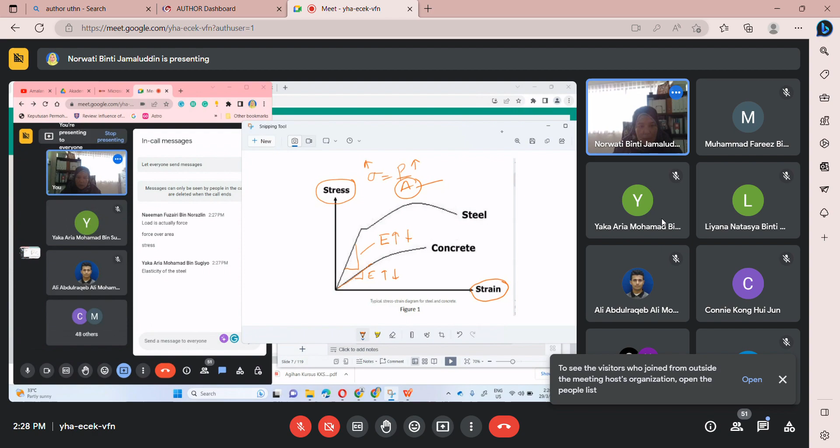So what can you say? Is this one higher or lower compared to concrete? Other than Yaka, I want other people too. Muhammad Aqil Faeq, yes. Is it high or low, still compared to concrete from this diagram?

We do not talk about higher concrete strength. We concentrate specifically on this figure, referring to the response from the stress-strain diagram.

your desired size - sorry, I'm not feeling well. Okay, based on your desired size, sometimes you need to build up the section because of the standard size. For this class, we will refer to standard sizes based on the Blue Book. So in the Blue Book, you can see a lot of sizes.

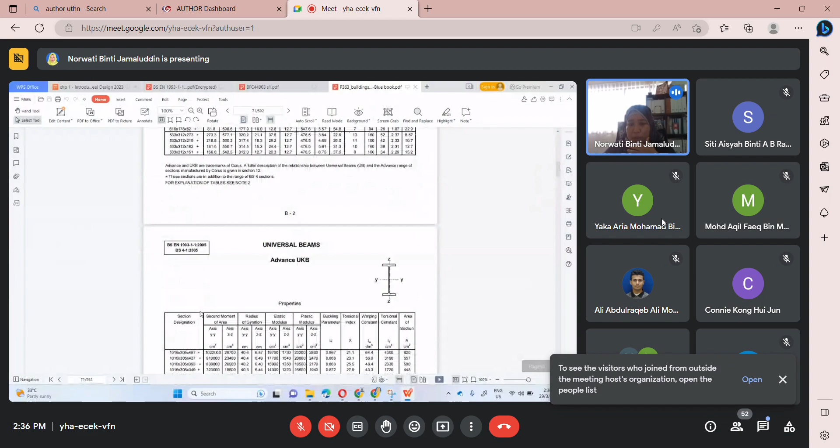I'll just take one cross section, we call it universal beam. See how many sections we have? A lot, right? See, okay, the largest is 1 meter, 1 meter. And then the smallest is 300, no wait, 127 millimeters in terms of its depth, in terms of the depth, the height. Sorry, not depth, height here.

127, okay, this is the design method section. The actual height is also 127, though sometimes it will not be the same for all cases. Okay, you can see from here, this is the section designation, this will represent it a bit.

Okay, I'll take the section on the top. This one, 305, means that this is the height, roughly 305 millimeter. But if you look at the actual height, it's only 311.

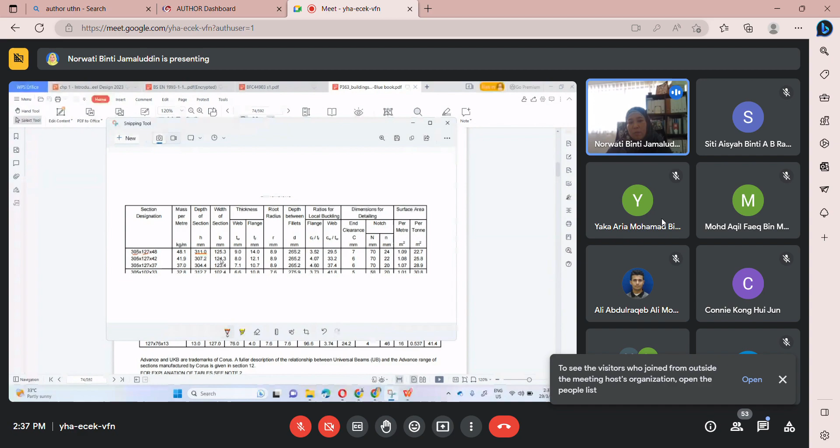This one represents B127, actual 125.3. You can refer to this diagram. This is H1, this is the B, the breadth. TW is the thickness of the web.

This is what we call the web. This one we call the flange. This is the thickness of the flange. Boleh faham? That is how you use the standard table.

That is about the term: hot roll, cold form, build up, fabricate - build up is the same. Normal structure steel has tensile and compressive yield strength in the range of 250 to 400 MPa, which is 8 times more than the compressive strength of normal concrete, and over 100 times more in terms of tensile strength compared to normal concrete.

Yield strength is an important characteristic in determining load carrying capacity of a structural element. That's why when we calculate, when we want to determine the capacity of the structure, the term we use is resistance. The formulation will be moment capacity resistance, MCRD - M stands for moment.

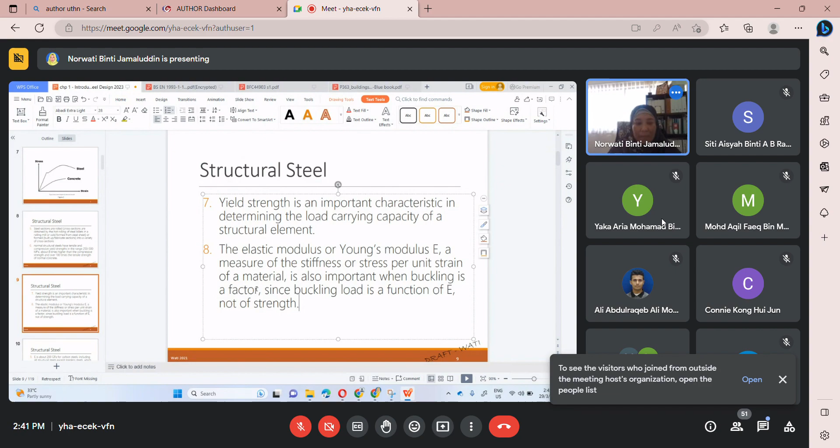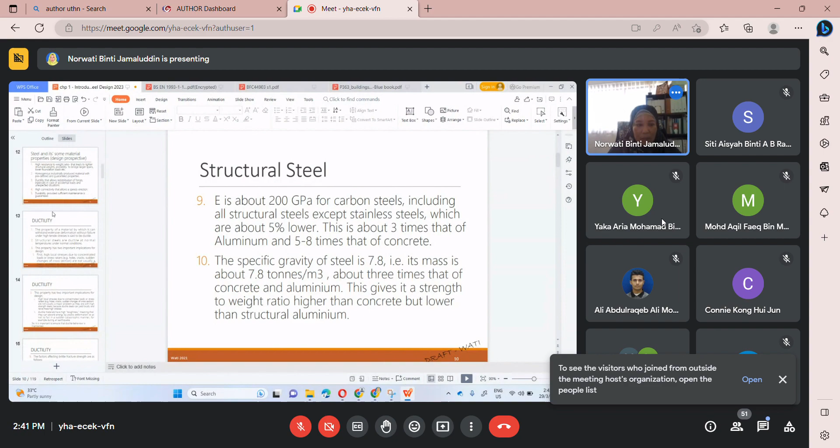We'll not go into detail for this slide, you can have my slide and read on your own. Now it's about steel properties. To design effectively, you need to know about properties of material. Steel is the strongest, stiffest and densest of the common building materials.

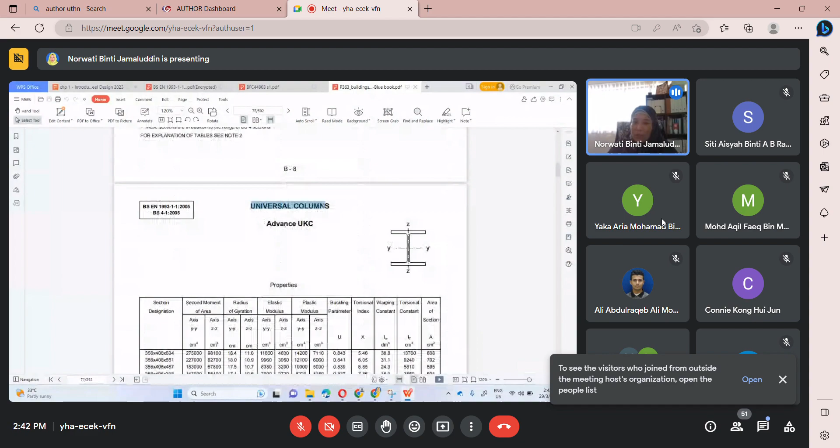Open section - what can you understand about open section? Let me just say it: open section, for example, this one - this is open section, this is universal beam. We also have another open section, UC or universal column. This is the shape, see, it is open, then we call it open section.

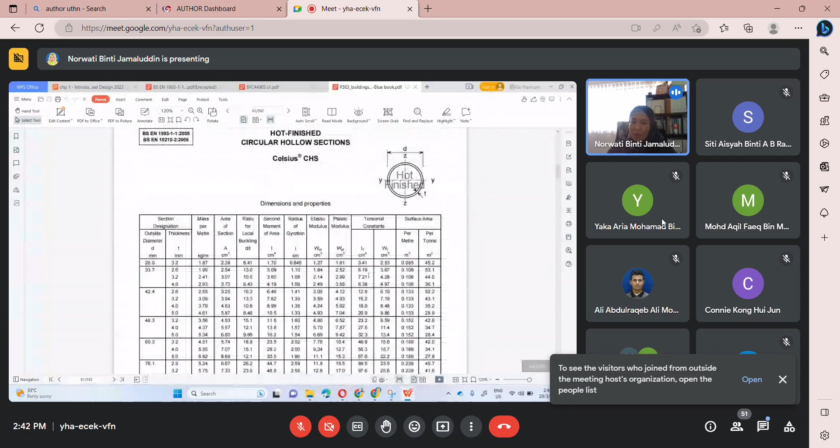We also have closed section, for example circular hollow section. This is closed section. So for open section...

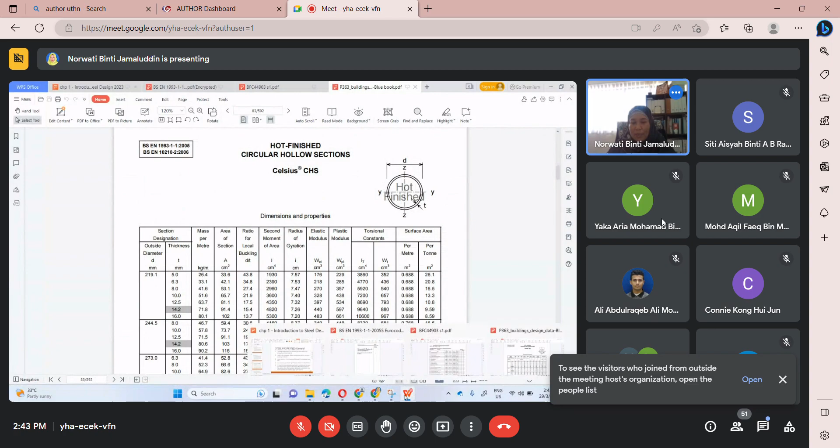It's prone to torsion force. Then when you want to evaluate the capacity, you need to consider torsion resistance because of the open section shape - from the testing, normally they will have much lower torsional stiffness compared to closed section. Box section, this closed section, will have higher flexural.

So what is good about higher flexural? High flexural, of course, is for elements you will use for flexural members like a beam. If a box section is good in flexural, let it be used for that example. Also, box section has higher torsional stiffness.

In case for a bracing system, particularly compression brace, a circular hollow section is most efficient structurally. This section also offers greater resistance to corrosion and is more aesthetically pleasing than open section. That's why if you look at a compression member, you will not find an angle section - normally we will use closed section.

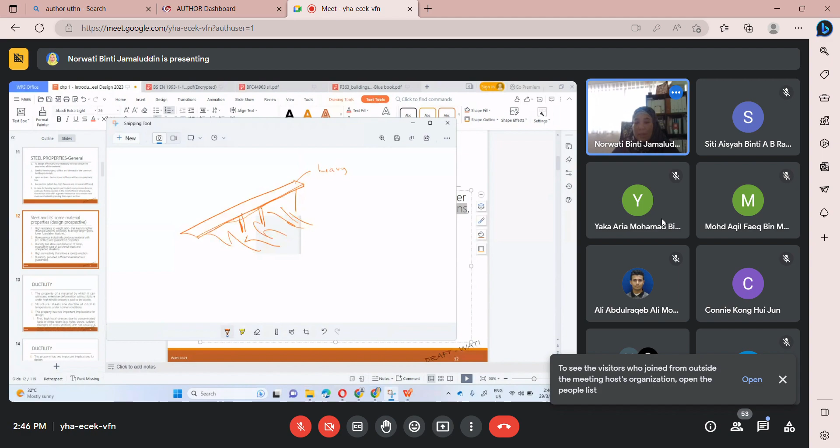Otherwise you need support - support we call a pier, pier here, pier here. That's just common sense, kan? If you can have a lighter weight, that means much lower load that will be supported by the foundation, so you do not need a larger foundation there.

And still it is a homogeneous material. Why is it homogeneous? Because it was manufactured in a controlled condition at the factory.

So it is a homogeneous, industrially produced material with predefined and guaranteed properties.

Okay, another property is ductility. What can ductility do? Ductile means it can stretch. Like when you hold plastic or a rubber band, you can stretch it far until it breaks. Okay, that is ductility. So steel is actually ductile.

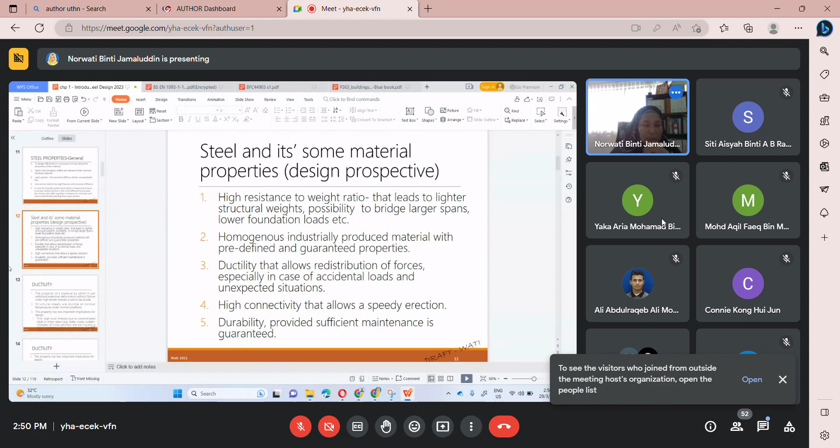Okay, durability - durable, tahan lasak (hard-wearing). Durability, provided sufficient maintenance is guaranteed. You want a durable car, right? Because we do not want to visit the workshop frequently. We want something durable.

So ductility and durability - these are the characteristics or properties of certain materials. Ductility is the property of a material which allows it to withstand extensive deformation, change shape extensively, without failure under high tensile stress. That's what's called ductile. Steel structures are ductile at normal temperature under normal conditions.

If you have an event of a very big fire, do not assume that the steel will sustain more loads. That's the weakness of steel material. But of course, when you choose to use steel material, you have to come up with fire protection.

This property has two important implications for design. First, for ductile material, it will have benefits especially when it comes to high local stresses. High local stresses will occur or be experienced by the structure when you have a concentrated load or stress raiser.

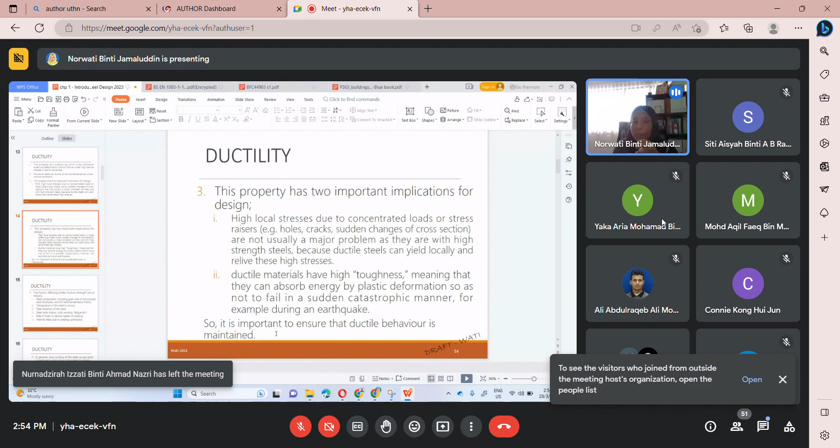There's a lot of other explanation regarding ductile material - I'll leave it to you. I do not want to go into detail down to the microscopic level, I'm not a metallurgy person. But of course you can read further for your own knowledge. This explains the arrangement of atoms in the steel structure at the microscopic level, because the manufacturing process actually affects this.

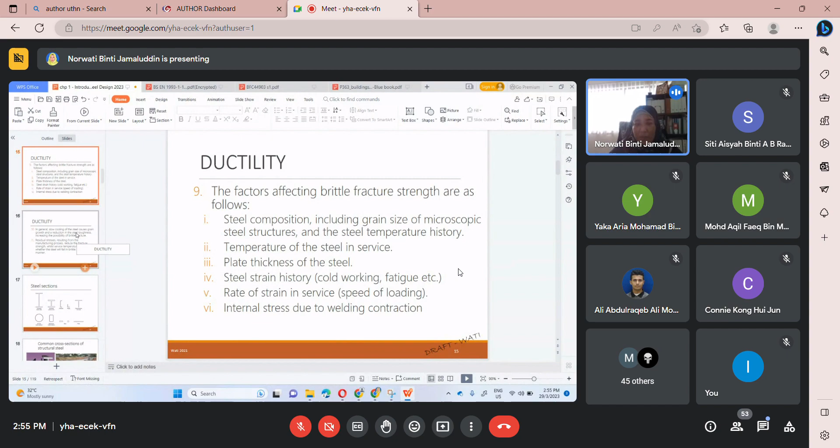That's why there's a different property between hot rolled and cold formed steel, because the grain size is also affected by the type of manufacturing. See, this is an example - slow cooling of steel causes grain growth and reduction in steel toughness, increasing the possibility of brittle fracture.

Residual stress means you put stresses into the structure. Apart from the manufacturing process, residual stresses can also come from welding - when you do welding, you actually introduce stresses. So residual stress reduces the fracture strength, while service temperature influences whether the steel will fail in a brittle or ductile manner.

Okay, so almost one hour. I need all of you to answer my one question.

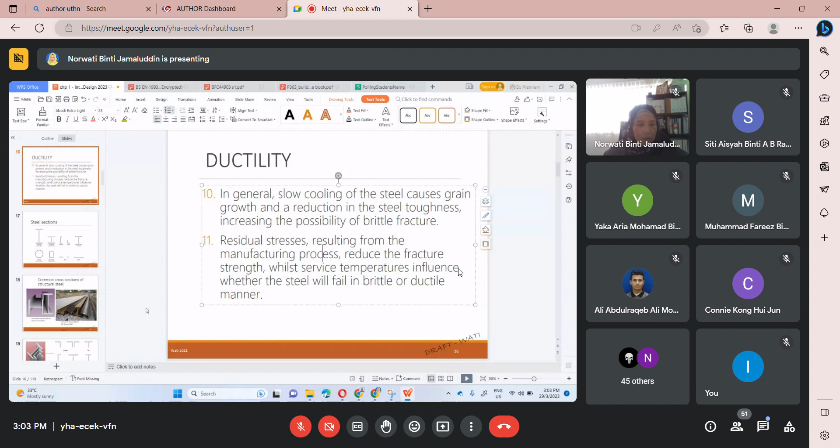Doctor hasn't turned on the mic. Sorry, okay, so I've ended the poll. Okay, we continue to our lecture.

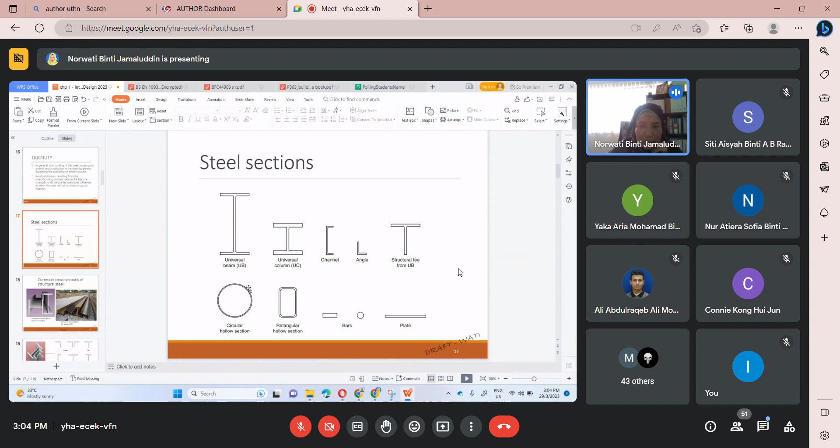So for steel section, actually we have various shapes and sizes of steel sections. Typically we will use UB, UC, channel, angle. That is the most common section shape used widely in the construction industry. Circular hollow section and rectangular hollow section, the other shapes are not so common. Structural tee not common, the common one is just this one.

Okay, here you can see UC and UB look similar, but if you look closely you can find that UC is more like an H shape, that's why sometimes we call UC an H section, while for UB, it looks like an I, that's why we call it an I section. H section, I section. This is the beam, universal beam. This is universal column.

Channel. Angle, sometimes we combine it, so it will become double angle. T section is not normally used.

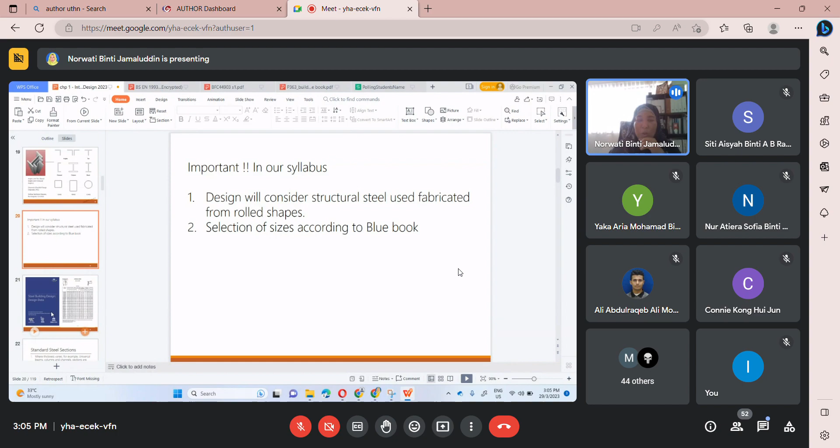I just want to stress that in our syllabus, the selection of size will be according to the Blue Book. We will not learn how to design build-up sections, fabricated sections, or cold-formed sections. Instead, we will concentrate on hot roll sections using the standard sizes from the Blue Book. Outside of this, we don't concentrate.

But it is possible for you to learn other types of design on your own, after you have learned hot roll using this standard size, because to me it is like 90% similar, just different properties, and there may be certain important conditions due to the limitation of the structural property, because the material, process, and material properties are different. Of course there are certain limitations you need to consider.

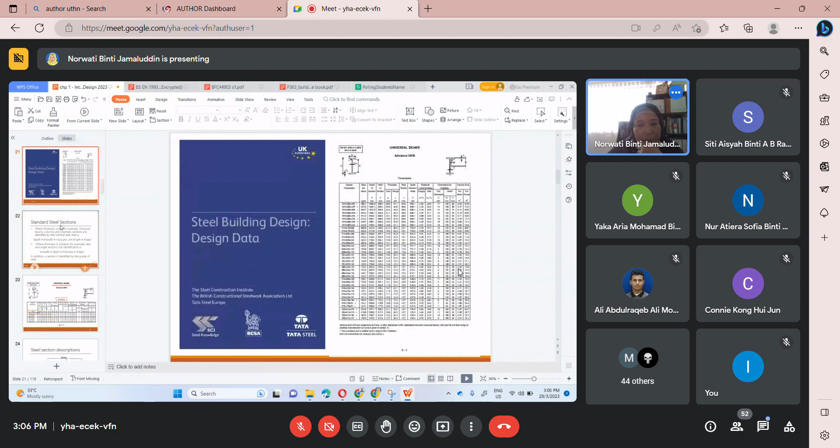Steel section, how do we name a steel section? We know that we have various steel section shapes and sizes. For universal beam, for example, this is universal beam, not only beam but UB, UC, channel, we identify them. How we write the size is by depth times breadth times mass, and then you put the shape. Height, this is how you name it.

You write the section, 305 times 127, times 48. Don't put 'times', just put UB or UC. This one is 48, this is kg per meter. You can write 48 kg per meter UC or UB. Okay, that's how you write it.

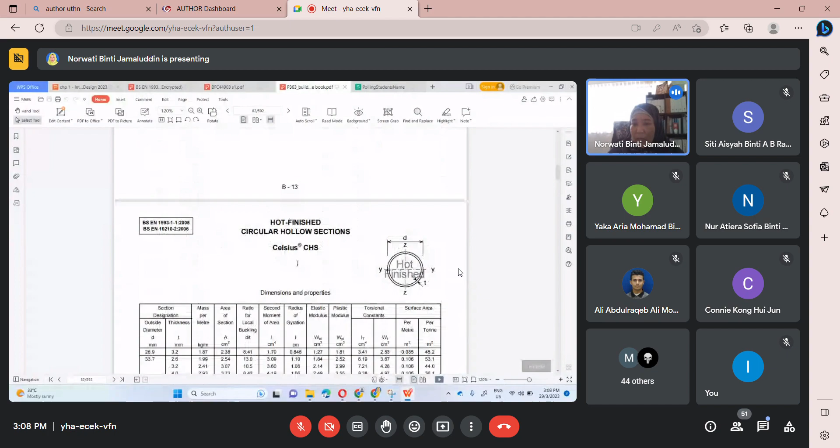For an element having constant thickness, for example angle having constant thickness, you do not have to memorize it, instead you have to understand it. How do we know whether it has constant thickness or not? You can check, you can refer to this Blue Book. For UB, different thickness, see, it's not constant. But for angle, it has constant thickness.

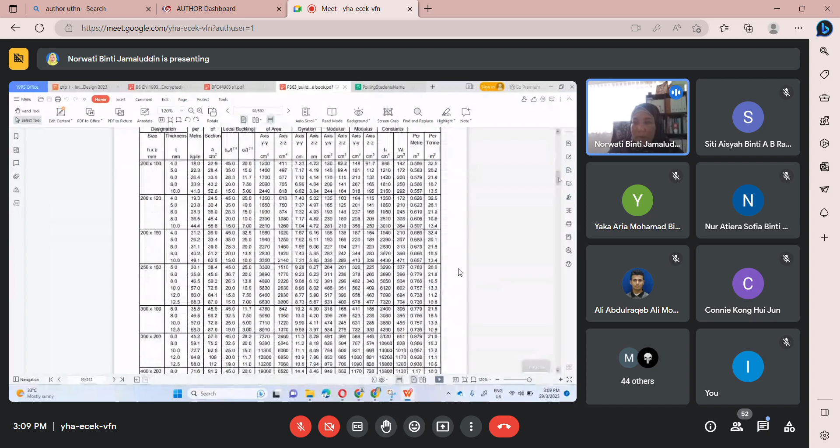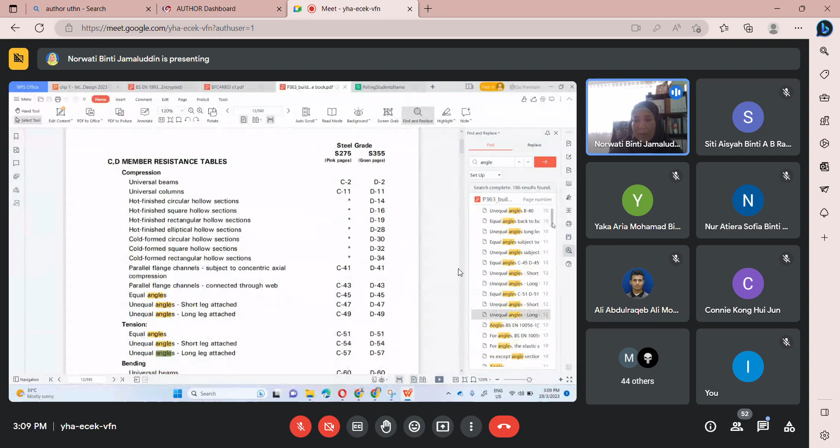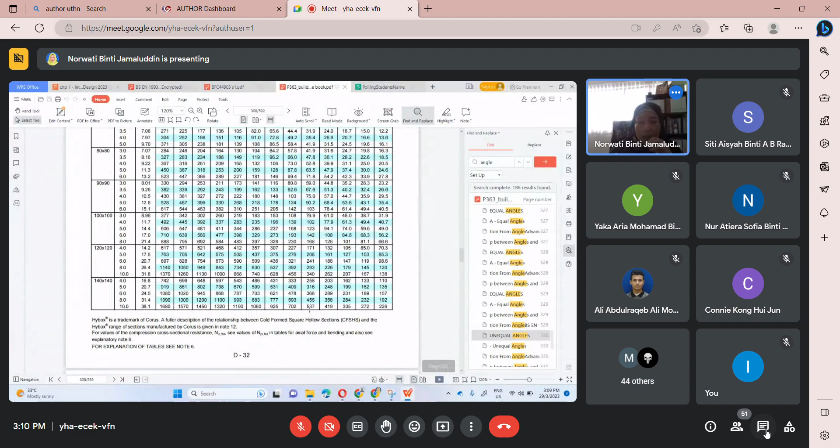Angle, where is angle? This is cold formed, angle. We have unequal angle and equal angle, it is about the different measurement of the leg. This one, angle, see, 200. Unequal, where. When we set constant, it doesn't mean all constant, but in a large group it is constant. Okay, never mind, couldn't find it.

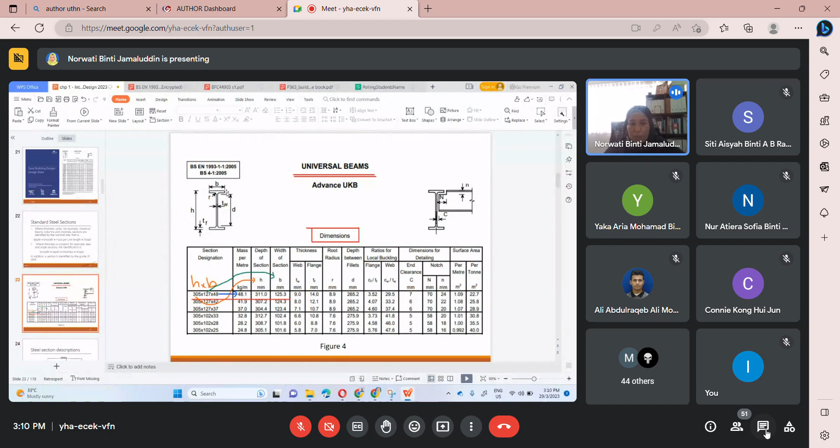So how do we write angle? We put it as breadth times depth times thickness times shape. Shape is L shape. So this is the example, just want to show you what is height. This is height, this is the B here.

Web and flange. This is web. Flange. Web is perpendicular to flange, that is web. Do not memorize that, just understand web. Web is connected at both ends, see, web connected here and here, while for flange, one end is free, one end is connected.

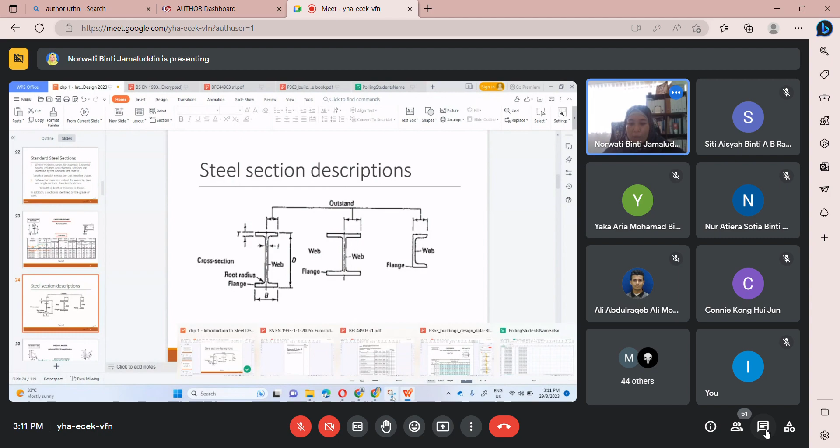Let me show it like this, measure here, free, connected. This is connected, that is web. This one is flange. Okay, this is angle, and of course angle also has various thicknesses.

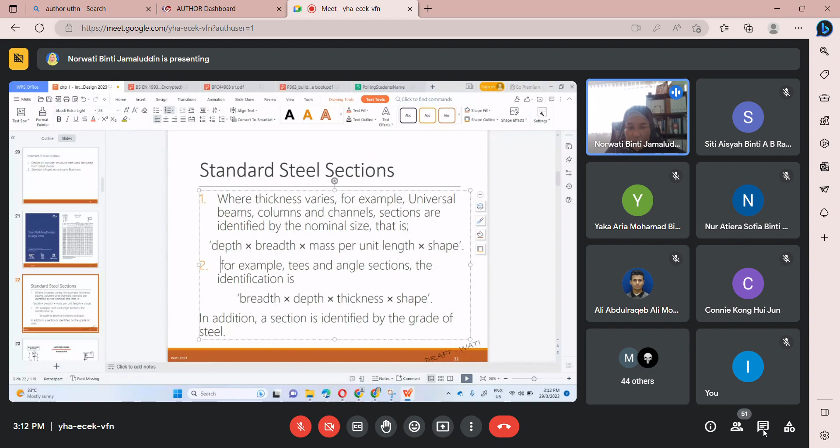Maybe I do not have to agree with that note, saying that thickness is constant. No, don't think that. Thickness is the thickness. We still have various thickness. For example, okay, this an angle, this is how you write the size.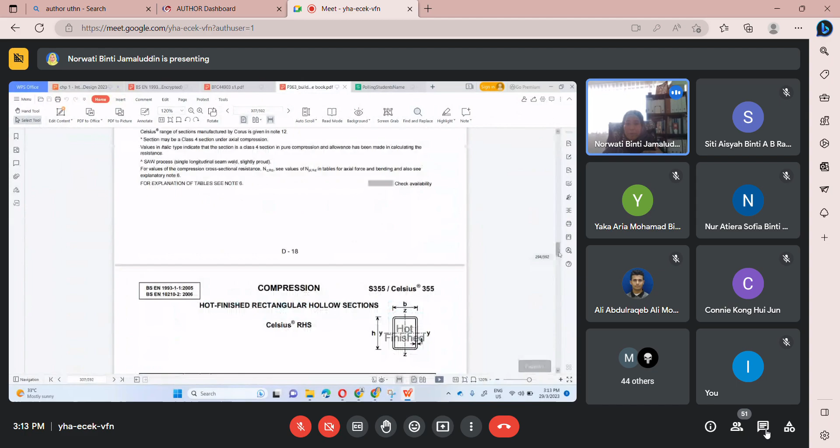What else? Built-up section. Like I said, built-up section means let's say you need bigger size, but the bigger size in the standard section from the blue book could not meet your design requirement. The largest size, let's say 1,000 something, is only capable to support 1,000 kilonewton. But in your design, you need an element that is able to support 1,500. So the other option is you come out with a build up section, and then design it. That is build up section, the fabricated section, normally applied on bridges.

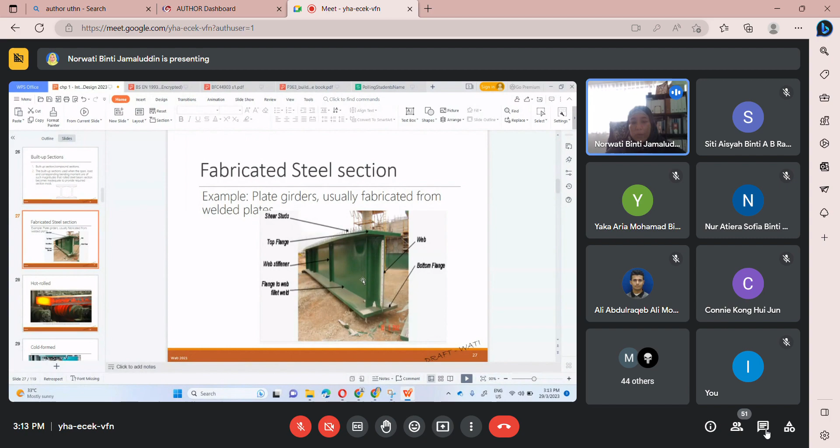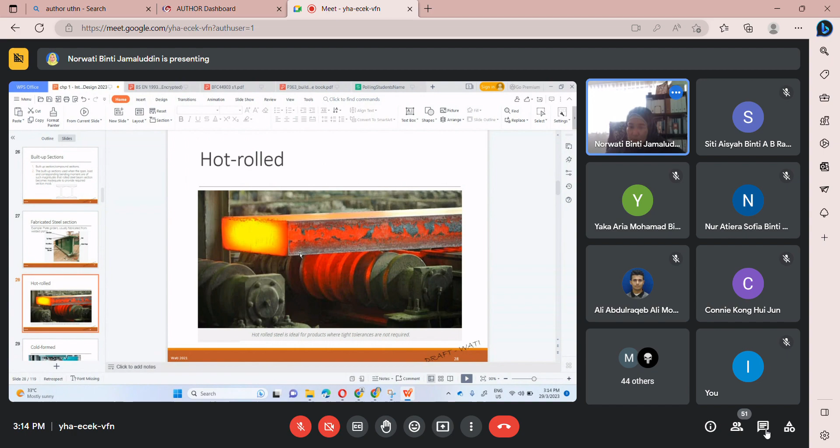Okay, hot roll. See, this is hot roll, being rolled into desired shape at hot stage. While for the cold-formed, you can see like a coil here, steel coil, steel sheet, then it will roll, but during the cold stage, that's why it is cool. We call it cold-formed. This one is hot roll.

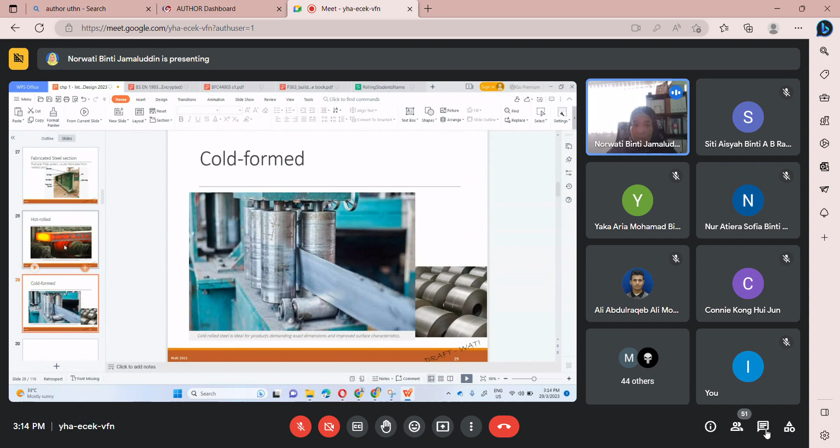Mechanical properties, we've touched a bit already. All manufactured material properties vary, because the molecule structure of the material is not uniform, and because of inconsistency in the manufacturing process. The variation that occurs in the manufacturing process depends on the degree of control. Variation in material properties must be recognized and incorporated into the design process.

At the front pages of your Eurocode, Eurocode clause 2.5, there's information regarding the testing of steelwork, because we try to control it, and if your material does not fulfill certain things in certain clauses in the Eurocode, it means you cannot use that Eurocode to design your structure.

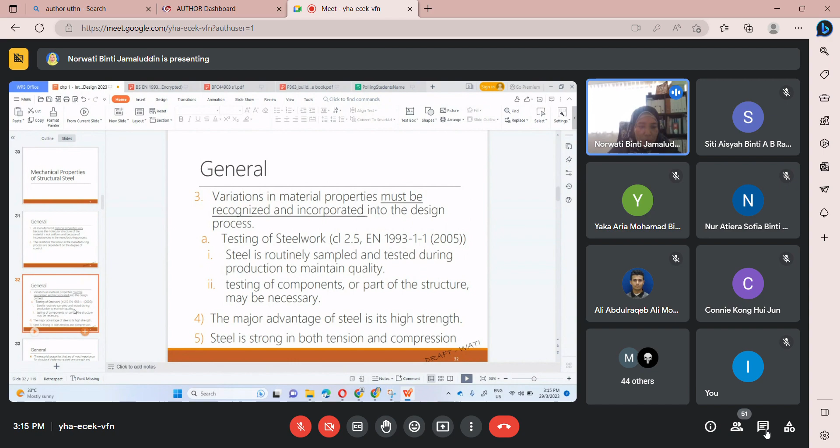Major advantage, this one you already know. This one is about material properties being important. When we talk about strength, the important thing is about its strength and also its Young modulus. Young modulus is related to stiffness.

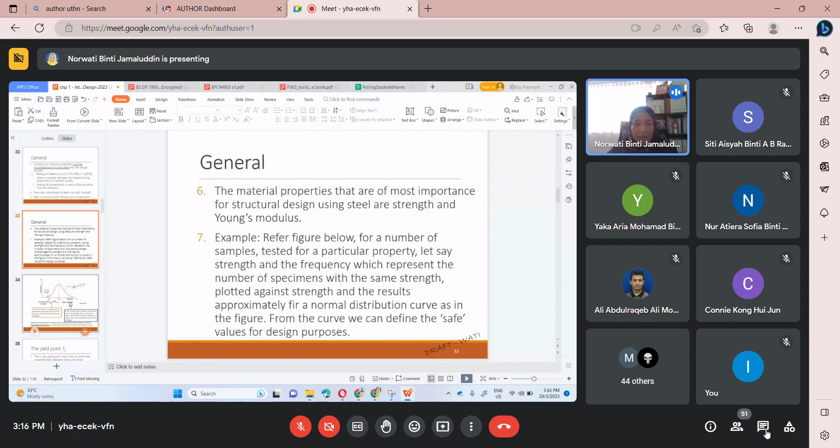This one I think you also learned when introduced in concrete structure, because for certain values we will use a constant value. How do they come up with such a constant value that can be applied to all designs? Of course, it will be based on analysis, based on statistical value. They are not randomly picking a value. This is how they do it: they just take 5% of the bigger pool of results, and then go to the lowest part. That's how the researcher can ensure the designer uses a certain value, but of course with certain analysis. I will not go into detail on that.

Fy is the yield strength. I put it like this because this note will lead you to the stress strain diagram, and it will lead you to where the point of Fy is. Fy is the yield point. The yield point is the stress at which the proportionality between stress and strain ceases. Some steel materials have both upper and lower yield points.

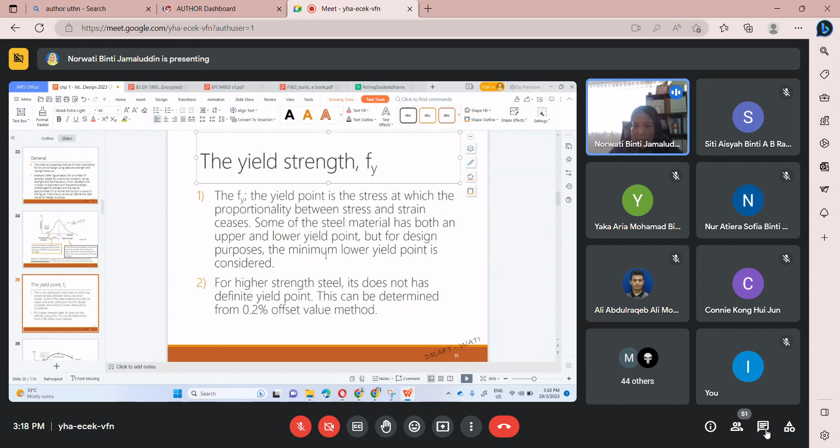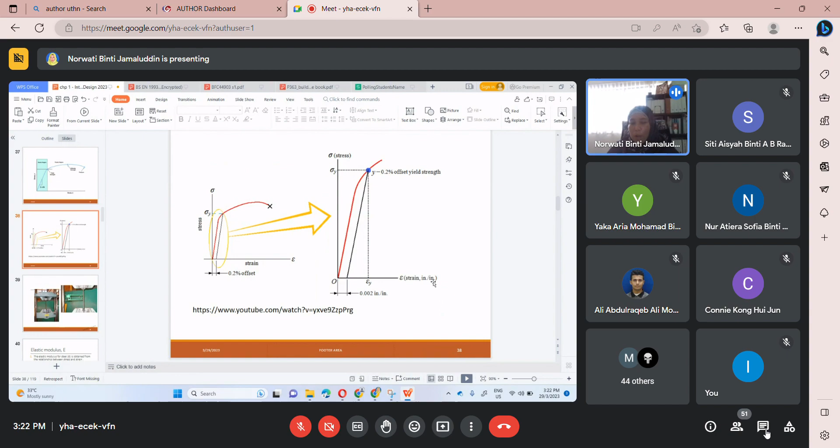Okay, how can you know about the properties of the material? You have to do tests. This is called as tensile test. What else do you use? Oh, coupon test. But this one is not coupon, this one is reinforcement. For steel structure, not reinforcement, you need to prepare a coupon.

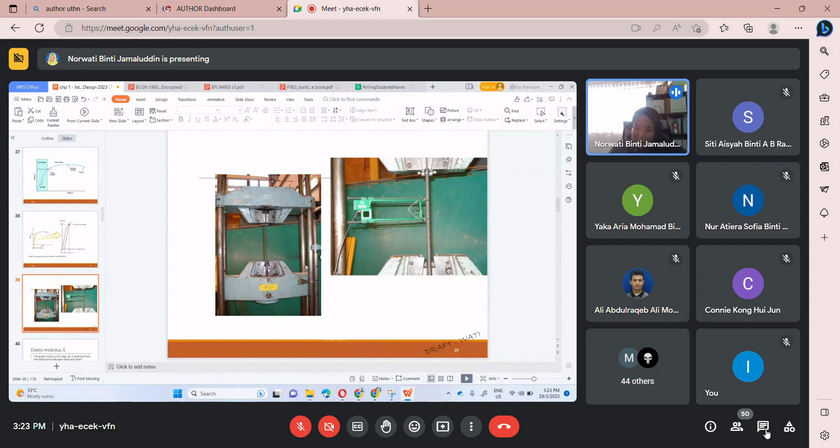Bone, it's like a bone shape. Then you test it, you pull, you put tensile force there, then you come out with the stress strain curve. Based on its stress strain curve, other than Fy, you can also determine the Young's modulus, which is the slope between stress and strain. And then you can know the ultimate strength, which is Fu. And then lastly, it will fail at the fracture point.

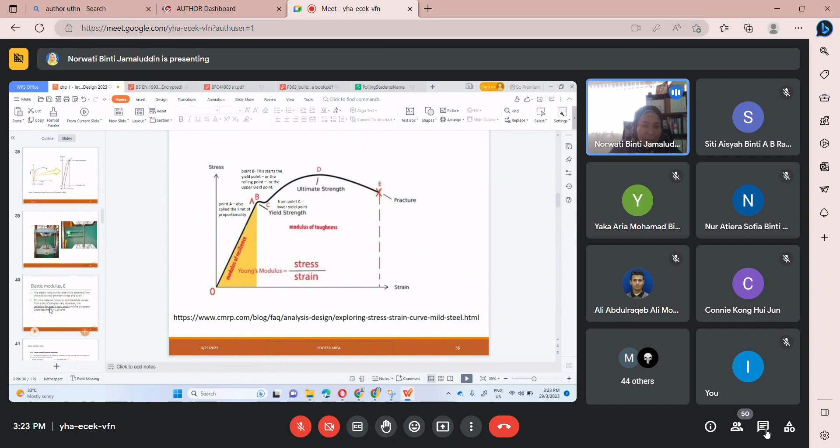Okay, that's how you can get properties, certain parameters. But based on Eurocode, if the material fulfills BS EN 1993, then you can use this code for your design phase. Then you can use certain constant parameters like E. This value is for shear modulus. You can also use the actual value of E based on your testing.

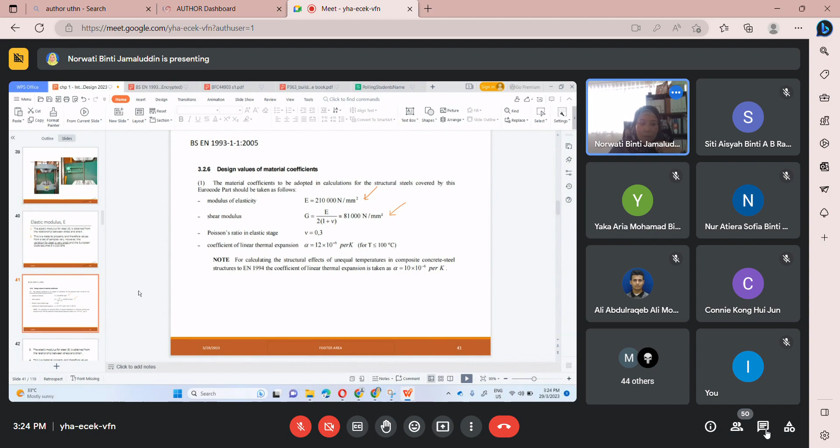This E, where can you get E? That is from the relationship between the stress strain curve. The material properties, this is a material property, and therefore the value from a set of samples will vary, like the curve earlier. However, the variation for steel is small, that's why you can assume it as 210 gigapascal.

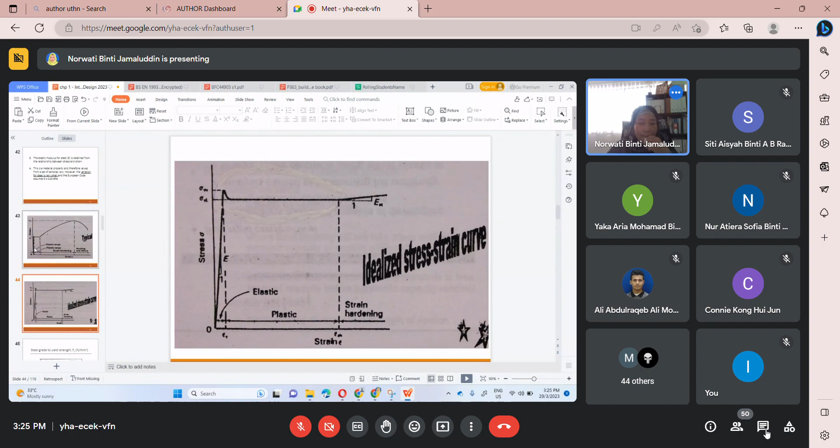Who else wants to ask? Saeed Mohamed Osman? Saeed Mohamed Osman? Syed, I've not seen you before in the list. Are you just... Syed? Oh, not Syed. Yes, Syed. Okay, Syed, yeah, okay, let's answer.

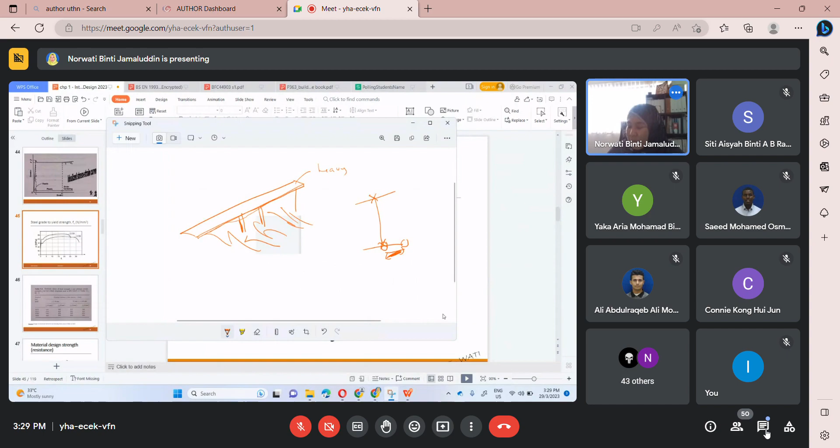Okay, just go back to the fundamentals. What's so difficult, epsilon, what is epsilon? Epsilon is strain, how can you calculate epsilon? Epsilon is, let's say, length, delta L over L naught. What does this mean? It means that it can stretch more compared to this one, meaning it is more ductile compared to this one because it can stretch. What is the difficulty here? What part can you not understand? Just relate it to the formula.

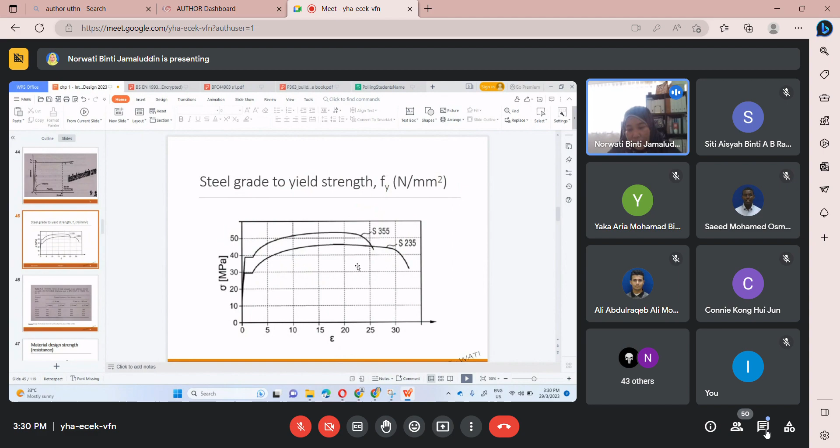This means that higher strength is much more brittle compared to lower strength. Even though it can have high strength, the Fu is higher compared to this one, but still the ductility is lower compared to the other one. Okay, can you relate that?

Can you relate that? Tan, can you relate that? Saeed, can you relate that? Saeed, I want to hear your voice. Tan, I want to hear your voice. Sumita, I want to hear your voice.

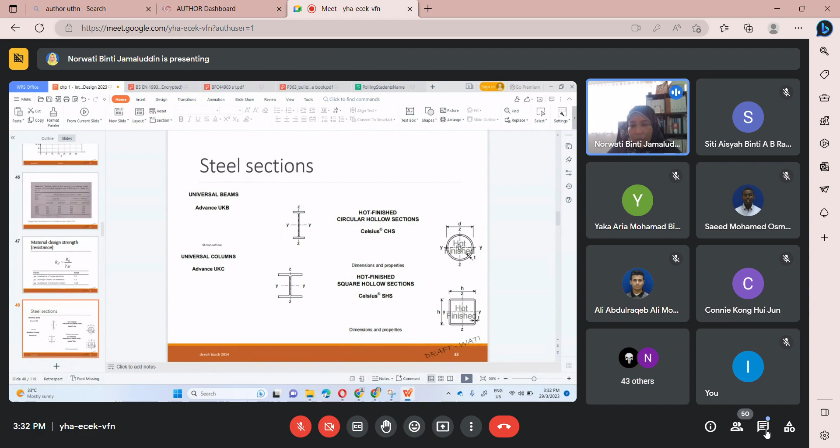This is the section again. UB, UC, we have hollow section. What else? UB normally we use for beam. Remember why? Because it is more efficient in resisting bending moment about the major axis. For UC or H section, the capability will be more to resist axial load, with the radius of gyration about the minor axis to prevent buckling.

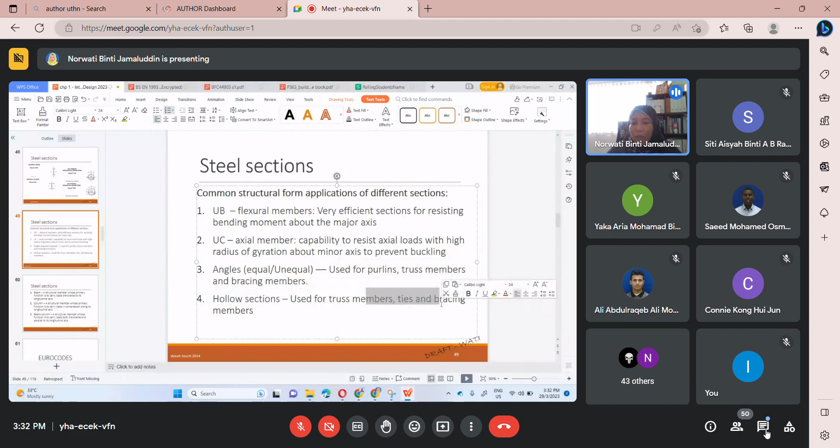Angle is normally used for purlin. Hollow section is normally used for ties and bracing. Okay, this is beam, okay, column, and then Eurocode.

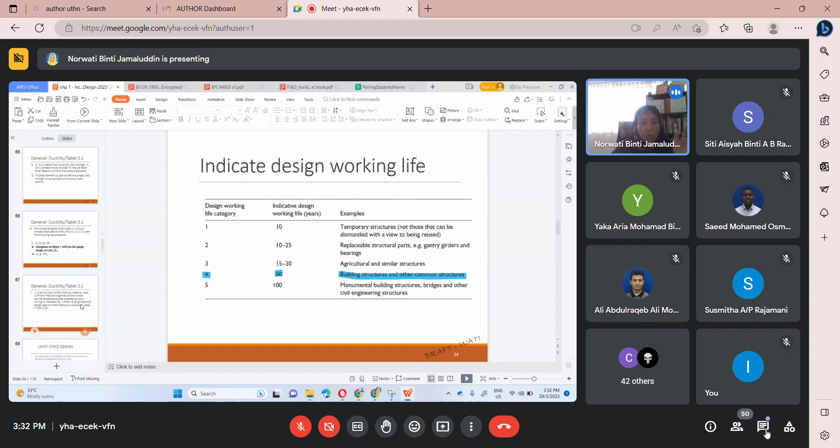Okay, I do not want to explain about Eurocode anymore. You've already enrolled in structural design, so I think you should be familiar with Eurocode by now. It's just that for certain things in Eurocode 3, which you will be taught in steel class, you will use Eurocode 3 in my class. So there's certain things that I will highlight to you, okay, like this one.

Okay, the design should possess adequate ductility. How do we ensure that? Just make sure of this, because we want to avoid brittle fracture.

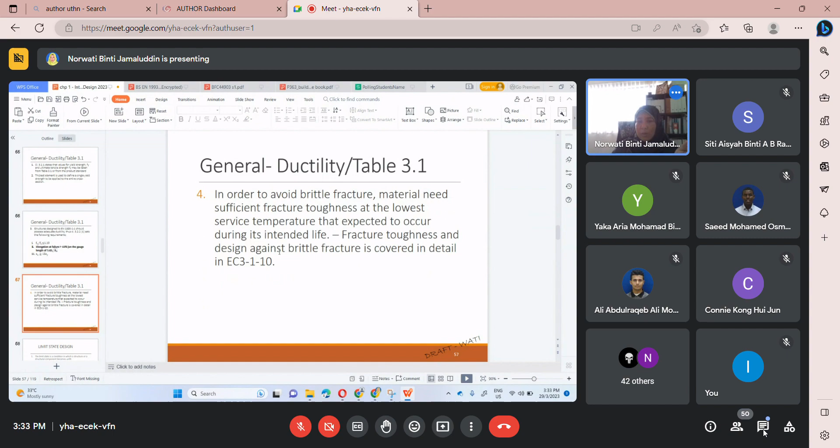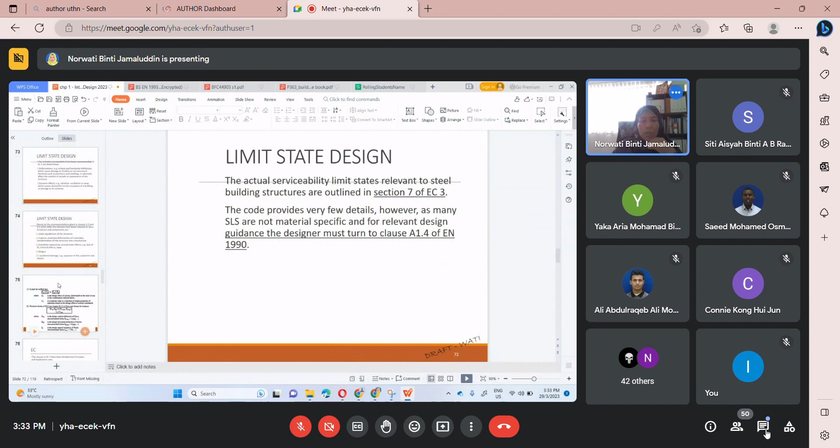About limit state design, you also have been introduced to limit state design, serviceability limit state. Okay, what is serviceability limit state? What is an example for serviceability limit state?

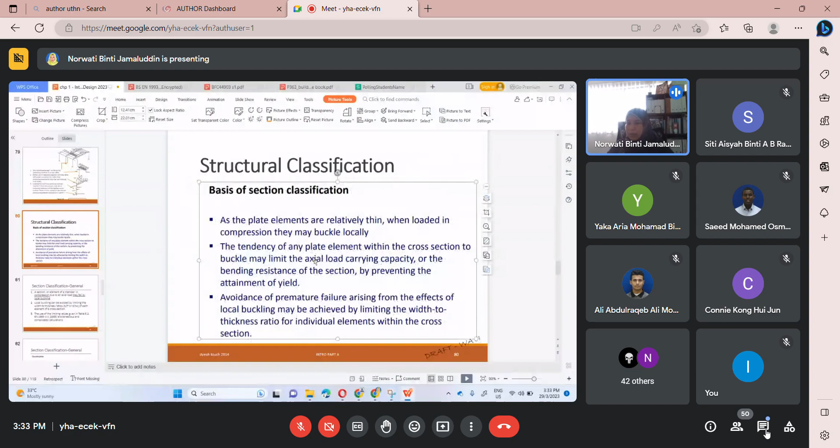About EC also, I do not want to chat about telling you about load. You've already learned it, you're supposed to have learned it. Okay, okay, next.

So one more poll. You've been given.

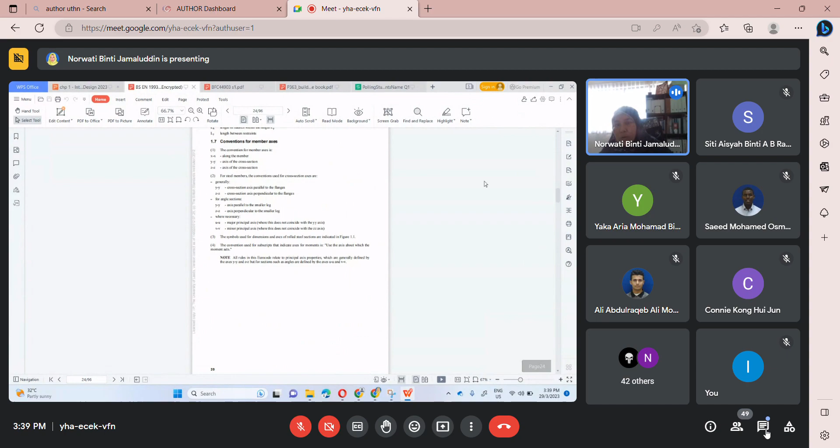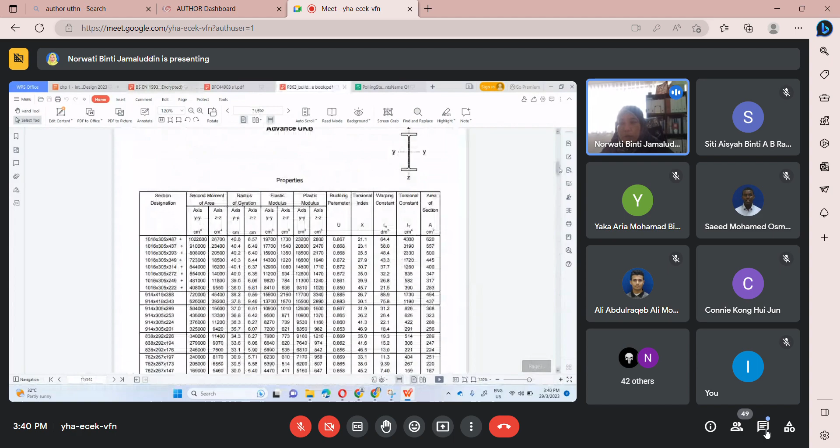Okay, here, according to Eurocode, sorry, okay, based on not Eurocode, based on the blue book, based on the blue book, this one. Okay, based on the blue book, we will consider C, this one, for local buckling.

C over T ratio, this one for flange, this one for the web. Okay, that is how we want to limit the local buckling in the structure, because local buckling is sort of a failure of that structure element.

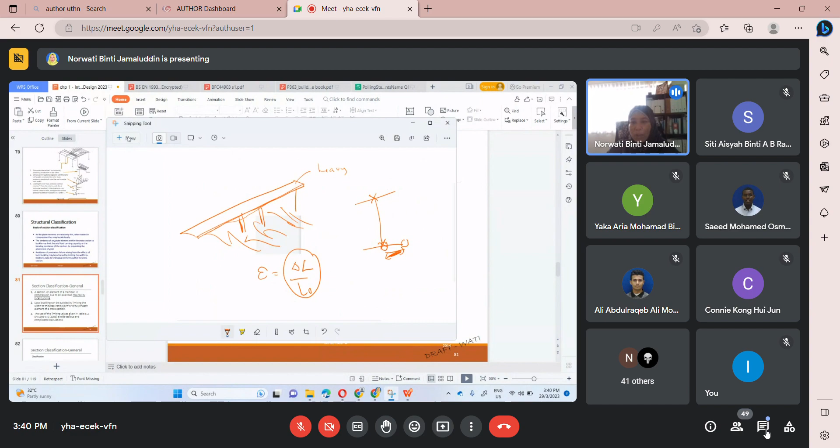So to avoid it, you need to limit the C over T for flange and also for the web. In fact, for each element, if you have an I section, for instance, this is how an I section looks like. So how many elements? One element, two elements, three elements. You have one web, this is the web, and two flanges.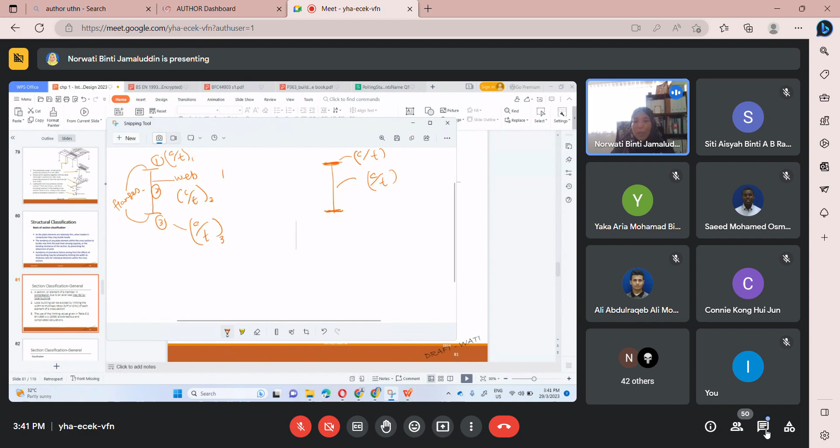So you need to limit the C over T for element 1, element 2, and also element 3. But since we are using an I section, it has a constant measurement for both top and bottom flanges, so you save a few minutes. Just conduct one assessment for flange, that's all. But actually for all elements, you check each element.

Okay, then you need to use the limiting value from table 5.2 in the Eurocode. Where is the Eurocode? This one, okay, table 5.2.

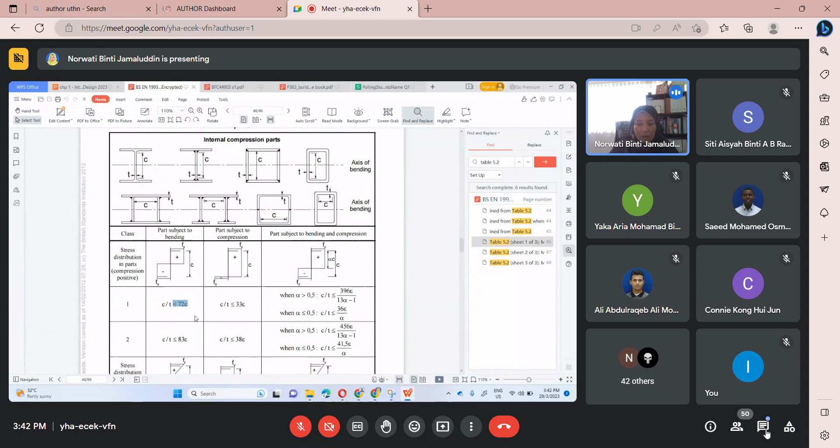Okay, we have actually 3 tables. Sheet 1 of 3, sheet 2 of 3, sheet 3 of 3. That's 3 tables. Okay, so you need to limit. Okay, this is the limit. Sorry, this is the limit. This one is actual. Okay, how to use this table? This is the actual. You need to compare with the limiting value.

This one is for part that's being subjected to bending. This one is for element that's being subjected to compression. So you need to distinguish them. Okay, that is the limit.

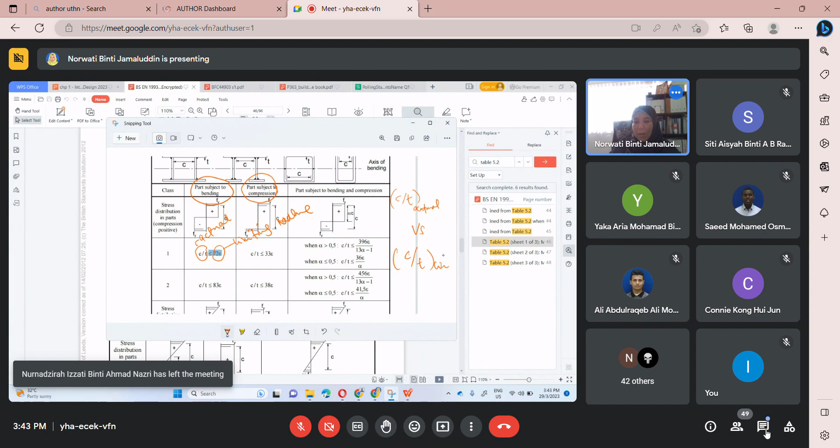So normally I will teach using jargon term by saying, okay, C over T actual versus C over T limit. I would use this kind of wording.

Okay, I think that's all. Okay, we will go into this. There are 4 classes: class 1, class 2, class 3, and class 4. The smaller class, class 1, is the superior, and class 4 is the weaker class.

This means that at the weaker section, local buckling is prone to occur. So in order to avoid that, in the design part we will limit certain things before the attainment of stress that will create the local buckling. Okay, before that, what is local buckling?

How does local buckling look like? Sorry, I do not have pictures, so it's okay. Online, we can always Google what local buckling looks like. How does it look? See, it's kind of like a wave. There's a wave, it's bent.

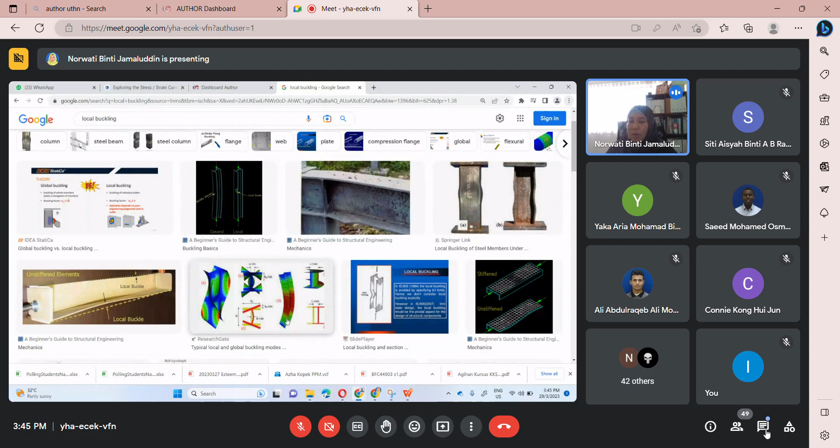This occurs locally. This one is also a buckle, but it is an overall buckle. See, overall buckle. This one is local buckling. We want to avoid that from happening.

It doesn't mean that we have to avoid certain sizes because using these sizes there will be local buckling. No, instead you need to consider the limitation of that particular size, that particular structure with that size. We design according to its capability. It's not that we say don't use, don't design, don't use this size. No, it's not like that.

Okay, so the classes are based on what? It's based on the slenderness, that's why width to thickness ratio. It's also based on the compressive stress. It's also based on performance requirement for resistance of bending moment.

Only these two we will concentrate on. Okay, so this is class 1, class 2, class 3, class 4. Please read, just to make sure that you know.

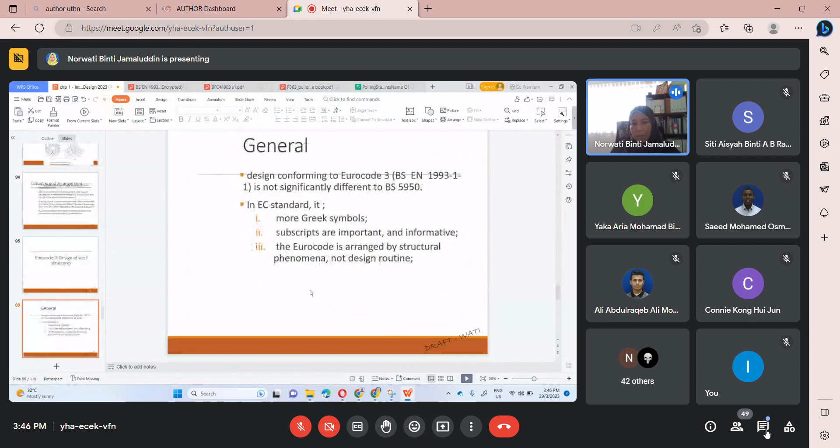Okay, this is the table. I do not want to explain about the layout, I think you should know by now. Also, I assume that you know about load combination because you already sat for structural design.

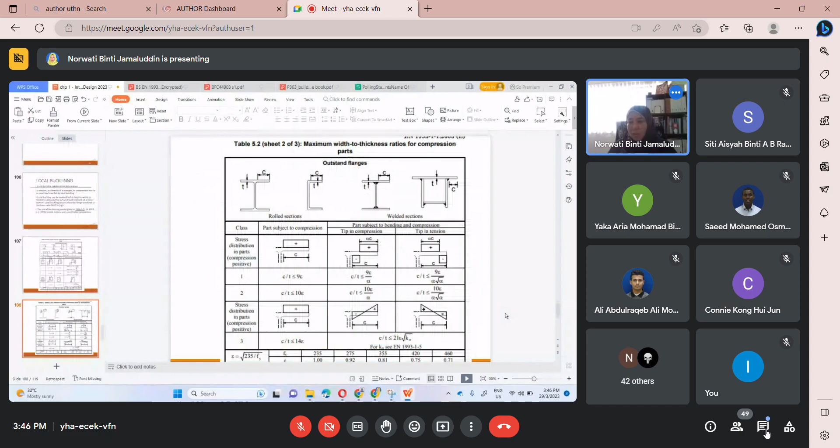Can I skip that part? So when you answer any test question or final question, please make sure that you already master this one and you don't have problem with this one. You said that you already enrolled for structural design, right? So I don't think you have a problem.